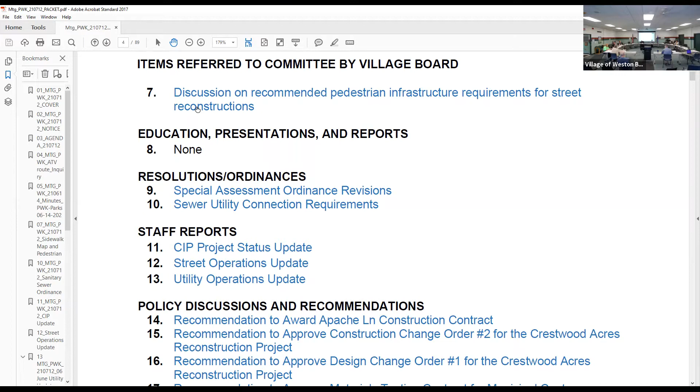Item 7, discussion on recommendation, pedestrian infrastructure requirement for street reconstruction.

Michael: So at the June village board meeting, they voted to remove the sidewalks from the Crestwood Acres neighborhood reconstruction project, which were being included based on the village's subdivision code as it is written right now. So the discussion at the board meeting focused on the need for the dedicated pedestrian improvements in the local street subdivision projects. Historically, we had a sidewalk and trail map which showed which streets would be getting sidewalk in the future, which ones wouldn't.

Our arterial and collector, our thoroughfare streets, would still have requirements to have pedestrian infrastructure. But the real question was what are the requirements, or what should the need be, for the local streets? So the task from the board was to go back and redevelop some criteria that could be used for future projects and provide the guidance moving forward.

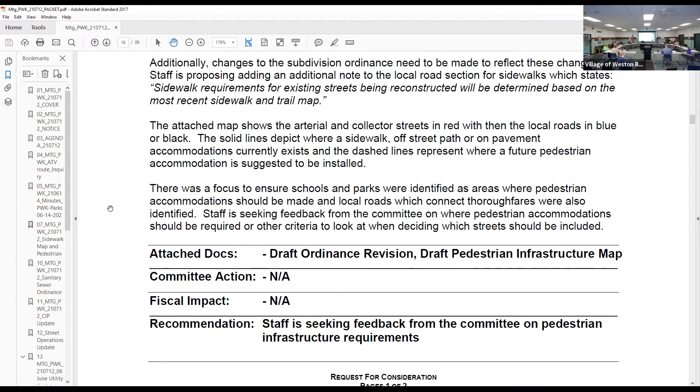So again, in the past, there was a focus usually to connect schools and parks within areas that met up with the local roads. So like Ross Avenue, Schofield Avenue are our arterial streets. So then streets that would maybe connect Ross Ave and Schofield Ave together would show up as a local road requiring sidewalk.

I guess we took a stab at this on this map. So the red lines are what is designated as our collector and arterial streets, which either already have or would get sidewalk or multi-use path in the future when the street is reconstructed. The solid blue lines are local roads that currently have sidewalk. And then the dashed lines are kind of the thoughts on where we, at the staff level, or even looking back at old maps, thought of adding sidewalk.

So just to note, Schofield Avenue has one side, the south side, with a sidewalk, correct. Is there any thought on the north side? Because before, I was saying, municipal centers, this side, a lot of people walk through. But now we're gonna move the municipal center to Camp Phillips. Still, we should think about it, or do you think there's a need for it?

Yeah, like I said, the code requirement right now for any arterial or collector street is, upon reconstruction, it would get sidewalk on both sides or a multi-use path on one side. So I guess if we were to reconstruct this, or if the village board said we should put sidewalk on the north side of the road as well as the south side, I guess we would do that. I guess the main question right now is just what do we do with our local roads, our neighborhood streets?

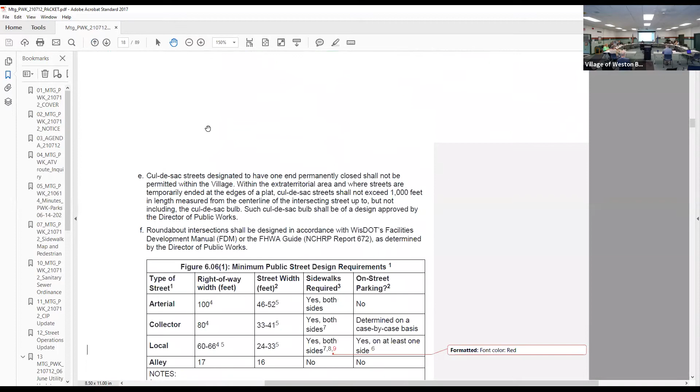Okay, now you want to talk about the collector street? Well, the local roads, the neighborhood streets, like I said, looking at how the code reads currently, jump up to that. Any arterial or collector street, sidewalks are required, yes, both sides, with the one caveat that sidewalks could be 5 feet wide, either a 5 foot wide sidewalk or a single 10-foot wide multi-use path.

And then for some collectors, if they're in a more rural area, they could be paved wider and have a paved shoulder instead of a sidewalk. So I guess the main question is on the local road, if we are changing that, how do we want to change it? I guess right now, I just had a note there that for local roads, sidewalk requirements for existing streets being reconstructed will be determined based on the most recent sidewalk and trail map.

So when I read that and reviewed it, my thought right away was, do we really want to be that definitive, or are we going to paint ourselves into a corner? Do we want to add the word 'primarily' be determined? Something like that, yeah.

Yeah, I just said that because there's all kinds of situations I started thinking about where you might decide, in this situation, even though it's not laid out on the plan, maybe you would want a sidewalk for some reason. Is there additional traffic in some area? Is there some type of public, a school or a bus stop, or I don't know what.

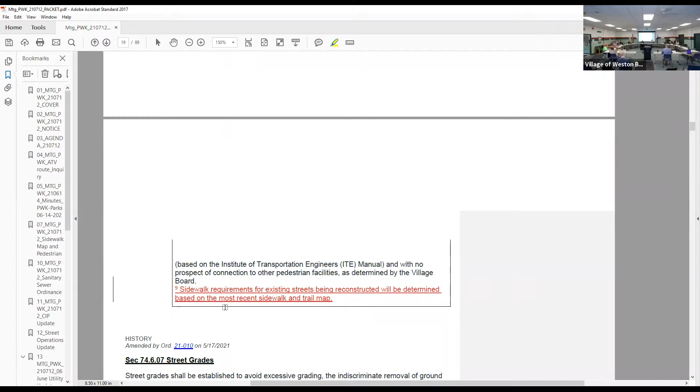Well, the thing is, I think if you look at our neighbors, let's say Rothschild, when they annexed all this in the street area, that was about 4,000 people and there was no sidewalk in there. But the first thing they did, they proposed to people, they said, we're gonna put the sidewalk in. And people decided they want to come back to the town of Weston again, which was practically impossible, that's not gonna happen, because by law you cannot accept it. So they told the people, you're gonna get it, and I think they gave it to them, they gave a sidewalk in there, that was it.

And we are kind of, if people come and complain, we say, okay, we think about it, and we think about it, and we take it out. So I'm not sure where we want to be, we want to be in the middle of the road, or not to propose it at all. Or, yeah.

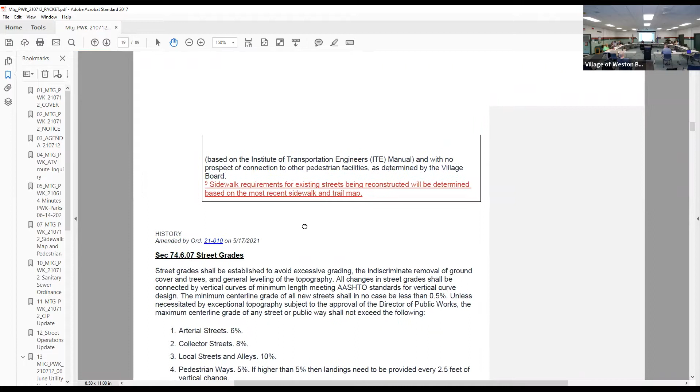Look at the subdivision and see what's the status of it, and usually I think the newer subdivision is easier, or we can tell the developer, that's part of your plan, do it. Yeah, and I guess that was the reason for leaving it as just reconstructed streets too, is new streets, that's part of the subdivision process of being created, determining what public infrastructure is included there.

I guess to Roy's point, that was the goal of trying to highlight where our parks and schools are, what routes make sense for connecting two busy roads to each other, like around Weston Elementary, put it all the way around there. Kennedy Park has sidewalk all the way around it currently. The junior high is missing sidewalk on one side, and there's really nothing on the back side of the high school, so we want to try to connect those to each other.

Or, the city of Wausau, talking with them, they seem to take everything on a project by project basis, and the committee and the board decide for each project whether we're putting it in or not. You mentioned the Village of Rothschild, that area that got annexed, except for Alderson Street - they reconstructed Wall Street a couple years ago and it didn't get sidewalk put back in. They pretty much have defined an area of the village that they consider their urban section, and the other part of the village outside that section just isn't going to get it.

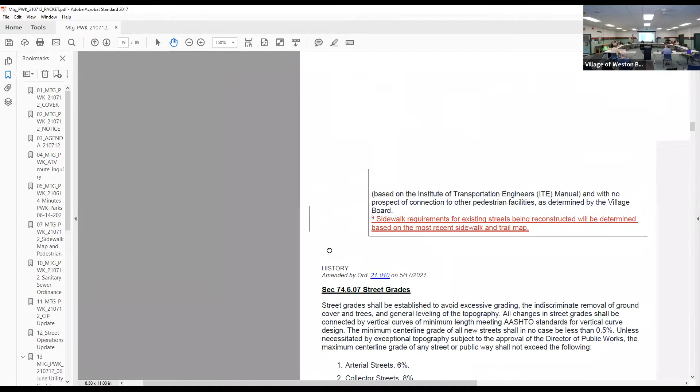So I think the message is we still need to consider all the multimodal or non-motorized pedestrian transportation needs. We used schools, parks, and shopping areas as criteria to establish where others might be needed. So if you insert that word 'primarily', I think that does leave some wiggle room like you're talking about - we don't have to come back to revise the ordinance every time there's a proposed change. But at least we would, maybe we also add that it be subject to committee or board approval. Maybe that's the case in all of this stuff, I guess.

This street down the road here, before you get to Ryan, there's a park at the end of it - Teagan, could be. Yep. That street gets only local traffic until there's a baseball game at the end in the park. Then it is busy, very busy.

Yeah, so if you look at that, we had sidewalk being proposed in the future. If Teagan were reconstructed, there'd be sidewalk from Schofield Ave to Teagan, and then even on Fife over to Bryant Street. Okay, so what about down here?

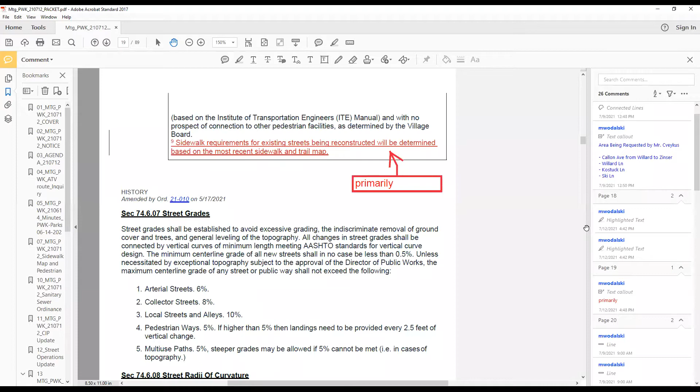I'm of the opinion, and I'm not 100% sure if Chairman Zagami touched on it, but if he did I'll reiterate it: for every new development that a developer is putting in, we should require sidewalks, full stop. And then also those large arterial streets that lead off into some other major residential streets, like what you said, Director Wodalski.

Maybe not Rodney, but East Jelinek and East Everest, I think, would be good examples of that second tier that should have sidewalks.

So on that one, we do have East Jelinek shown as a sidewalk road. I don't have it on East Everest, but it is on Barbican, so Von Kennel would be the future sidewalk street as well.

Is East Everest one we feel we should still put it on? Well, we voted just to not do East Everest. True, yeah, so I guess that's my last one, but that sort of situation.

Even like the Sandy Lane neighborhood, we showed it on Sandy Lane going in, and then kind of Canoe Street wrapping around to Quentin out to Mock Miller Park, and then Isaiah Street making a loop out there on the east side, but not going west. So I guess those would be conversations too inside those neighborhoods, if that's adequate or if there are other streets, but those would be ones we take on or discuss further as we get there.

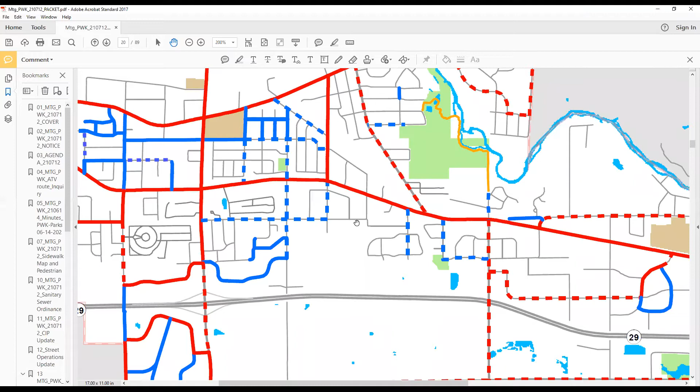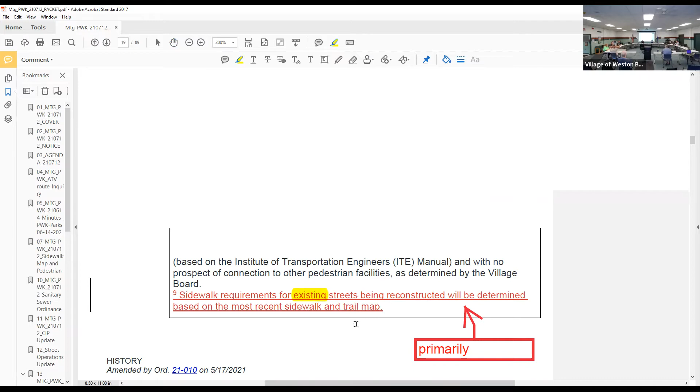Okay, and I think that's the proposal still, that it would remain, I think we have that one in the ordinance. Yeah, so that was, I guess the other part too is, specifically, where's my highlighter? For existing streets, put this note in there, so new streets wouldn't fall under that exception. It'd still be under, yes, sidewalks required on both sides.

Okay, then I guess we could probably debate how this map should look. Yeah, all night, yes, but yes. To Luis's point, or I guess the original staff report that went back to the board relative to this item coming back here was that I thought it would be logical to still connect East Everest, since the grading's been done out there, or at least it was. I don't think it's been filled in yet, but.

No. So I think one part of this tonight would be

any action on the proposed changes to the ordinance. But then also, with respect to the recommendation to remove the sidewalks entirely from Crestwood Acres, if there was some sentiment to still suggest that some be put back in. We can revisit other areas of the map later, but I guess any second thoughts about the Crestwood Acres project would be part of what you would want to address tonight as well.

Can you bring the map up for Chris? Yeah, so this is the Crestwood neighborhood, so this is Douglas, Randy J, Rodney, Kirk, Robin, and this is East Everest. And did we take them all out?

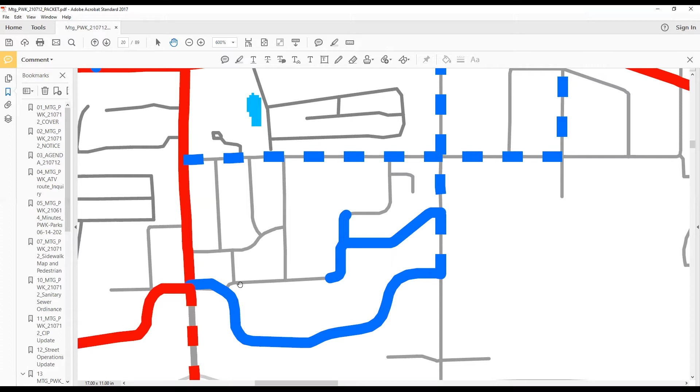Actually, I excused myself from the discussion because that would be an ethical violation for me. Sorry about that. All good, he just left the meeting. Yep, I recall that now.

So staff recommendation is put it back or just - well, wasn't it before the board took their action? I left it off on this map due to the board's actions, so I didn't put it on here after the board recommended we create a sidewalk trail map. When we went back to try to recreate a sidewalk map, I didn't put it back on there since the action at the time was not to install sidewalks in there. Which, again, 5 years from now if we wanted to put a sidewalk in, it would be possible. It's not impossible.

I guess the goal of this was just to try to make it so our ordinance can be modified so it matches actions taken. It has to, yeah. So we can't sit here and vote against the ordinance, then we shouldn't have an ordinance at all. So part of the ordinance is having this map.

So I guess the question is, are we adopting the map tonight, or recommending this version of the map?

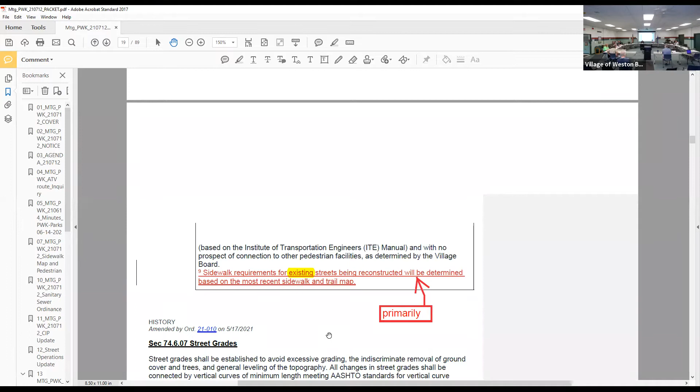What's the language you wrote at the bottom of this? It's not at the bottom, it's in the - yeah, so I left the RFC a little blank in case people - if you go to background, it'd be the 1st, 2nd, 3rd, 4th paragraph.

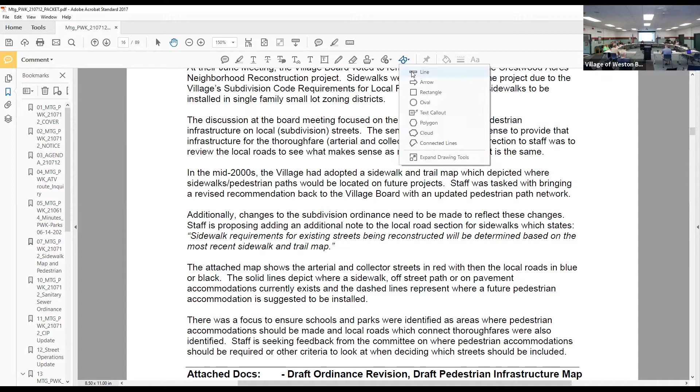So it's something else, which is - did you? Well, you made the motion, correct? Right, yes. Do I get a second? I will second, get in there. Is there a second? I'll second.

Okay, discussion. Any discussion? I think we had discussion already. No, I have nothing to add other than what we've already talked about.

Okay, Nate, are you with us? Can't you - you cut out, what is the motion we're voting on? Is this specifically for Crestwood Acres? No, it's for the entire village. Okay, if it's for the entire village, then - could you read the motion again, please?

What is the motion in its entirety? I'm looking it up, hang on. Oh,

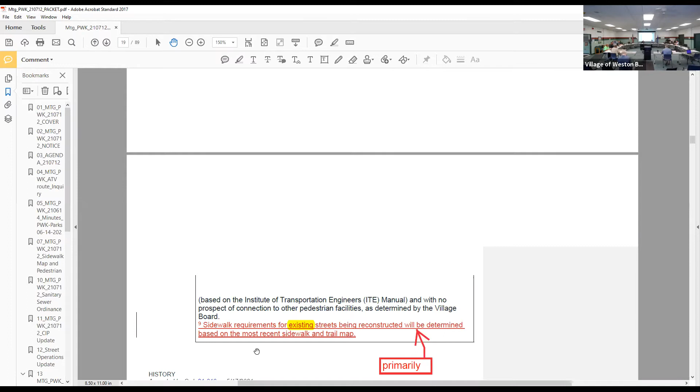Lewis suggested that the language primarily be added to subsentence 9. Sidewalk requirements for existing streets being reconstructed will primarily be determined. That's the motion, and we have it on the tape also, you can listen to that to make sure we got everything correct.

So Nate, if you could see the screen, the motion was to add note 9 to the sidewalk requirements for local roads, which would state that existing streets being reconstructed will primarily be determined based on the most recent sidewalk and trail map, with this being the sidewalk and trail map.

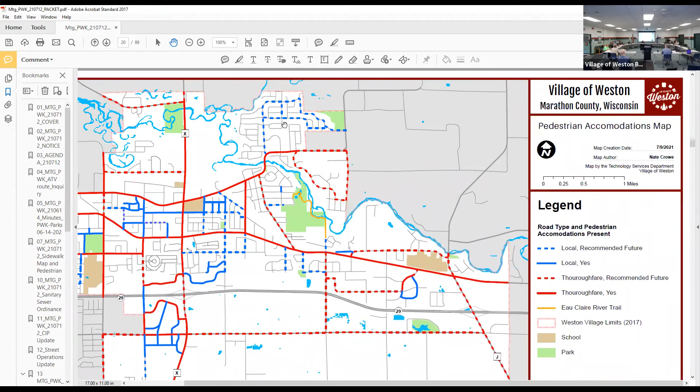Sam, you're gonna date that now? Yeah, so we'll date this map as of, I think it actually was recommended to the village board. Yeah, and that's what we recommend to the village board.

Okay, all in favor signify by saying aye. Aye. Nate, yes, I voted aye. I have it, thank you.

All right, and then I think we got Bob in the audience here. Hey, guys. I've come up to the podium. Make it formal, right? Please, and your address for the record.

For the record, Bob Cveykus, 5107 Ski Lane, Weston, Wisconsin, 54476. Got it? I can go slower.

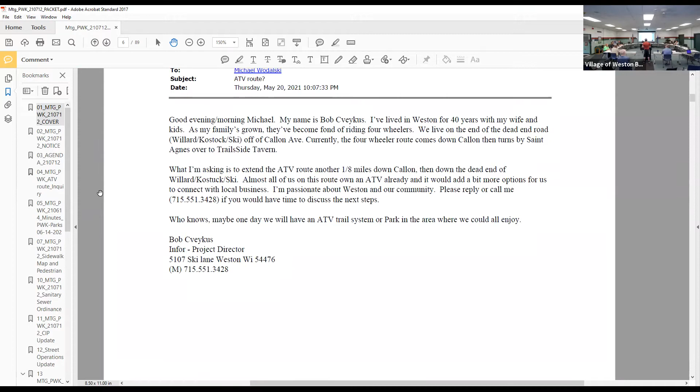All right, so I sent this over to Michael here, this email. Ultimately, just wondering if we can extend upon the current ATV road system. There's a perfect picture right there. You guys did great work already. I think it speaks for itself, but if you look, we're on a very rural street, dead end.

All of us on that road, I would say 90% of the people on that road anyway, all own ATVs, UTVs. Would definitely be value added to extend upon what already is there, go down another 1/8 mile of road, and just extend it from where it cuts over right now to get to, I don't know, by St. Agnes right there area, to continue it down Callon and then down Willard, Kostuck, Ski.

Like I said, very rural area. We all are owners of ATVs, UTVs already. So I don't know, just open to any questions you guys might have as to what your thoughts are on that. I think your letter said everybody in that neighborhood has an ATV. Yeah, I would say, on there.

I was actually doing a count on it. I counted about 14 driveways, but there's 2 or 3 driveways that I've never seen anybody in, but obviously they could build down the road. So that's about how many there are, give or take. I've got onX, I could tell you exactly property owners, but I was just going by driveways. So you say about 10 households? Yeah, probably about 10 or 12 ATVs that would be in that area, yeah.

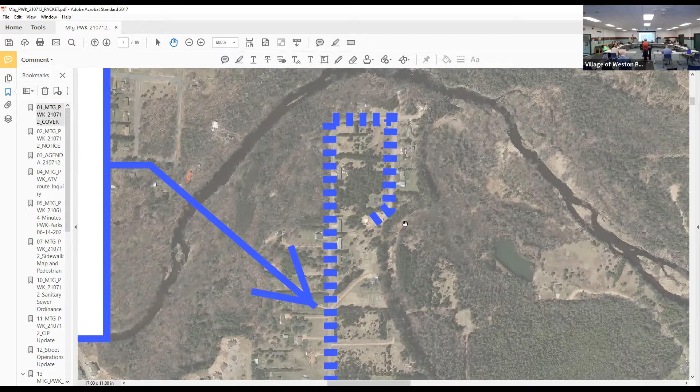Tell you a long story, I was out in South Dakota, out in the Badlands. I'll keep it brief, but it was amazing, the community and how people abide by the traffic laws. You don't see anybody, and I don't know about Kronenwetter or anybody around here, but you don't see anybody abusing the ATV system. It was just neat to see how different states handle it.

I wouldn't propose something for in the city, but out here in this area, I mean, I definitely see that we have the means of connecting up to it, being able to get to local establishments, other areas, being able to connect out.

My kids, as they're growing older, they're in 4-H. They're involved with a lot of the dairy barns down the road and stuff. And it would be nice for them as they age to be able to get from one area to the other, and go from, I don't want to say community to community, but be able to expand upon that a little longer. Now all that said, the way the laws are currently set up, my daughter's already getting her license, so really she'll take her car before she would take an ATV. But I still think it's the idea of having that ability, so.

Any question? Is there any other future development that's gonna happen? On those streets, they're all pretty large lots. People tend to have their houses further back from the road.

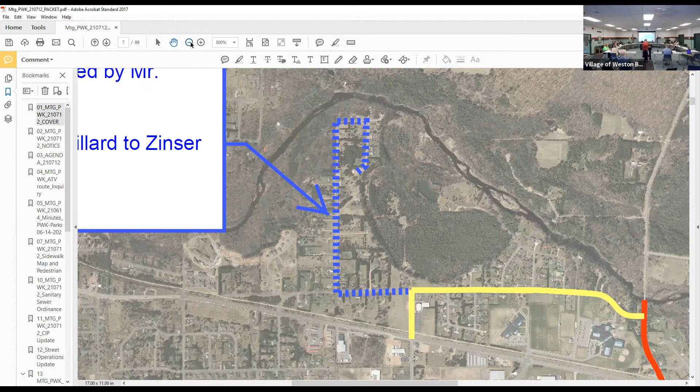Michael, the yellow lines, what are those? Earlier this year we had a request from the ATV club, so the yellow lines were approved, I'd say March or April of this year, maybe right before Roy and Luis both got on the committee. So there was a north part here on Callon and Zinser, and then the southern part was to connect to the village of Kronenwetter. So again, these are all primarily rural roads, meant to just help the ATV riders have that connectivity and ability to drive from one community to another here in the area legally.

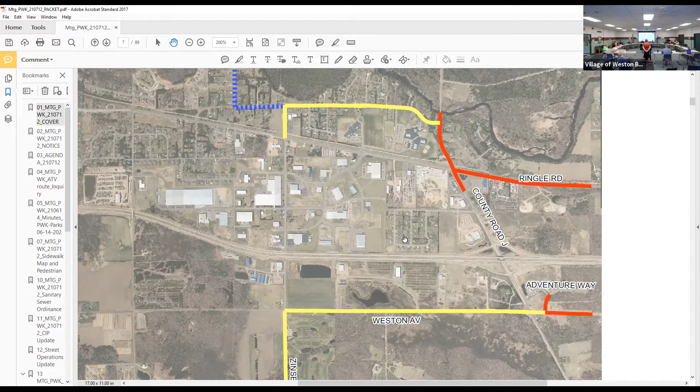I personally think it's a great idea. I'd love to see much more of the village added. I think it's kind of silly there's these other neighborhoods, also large lot zoning, that come off of those yellow and red lines that could probably be added as well, to be legal to drive to the trail instead of trailering a block down. But I think that's part of a bigger conversation.

And I guess we've just been... I would agree. One of the things that makes Weston really attractive is the recreation opportunities, especially being in northern Wisconsin. That means ATV, snowmobiles. It doesn't seem like this would be an issue. Let's do it.

Yeah, so I was just going to add, as a village, we've just been taking these on a case-by-case basis as people have requested roads. We've looked at them, had Everest Metro provide any insight.

So they're just riding on the street, huh? Correct, yes. Is there a speed limit? Yeah, it's 25 is what it's currently on the yellow, and the red is 25, so I would assume we would carry that forward as 25 miles an hour on everything. Or if it's slower, if a road was 15, that blue road, I would leave it at 25 myself.

I know the village of Kronenwetter, I believe they allow for it on any road that's under 35 miles an hour. Roads above that are not allowed for ATV, UTV use though. Okay, anything else? Your wishes.

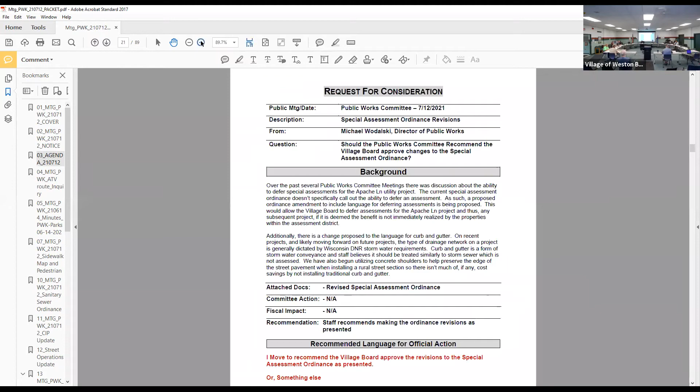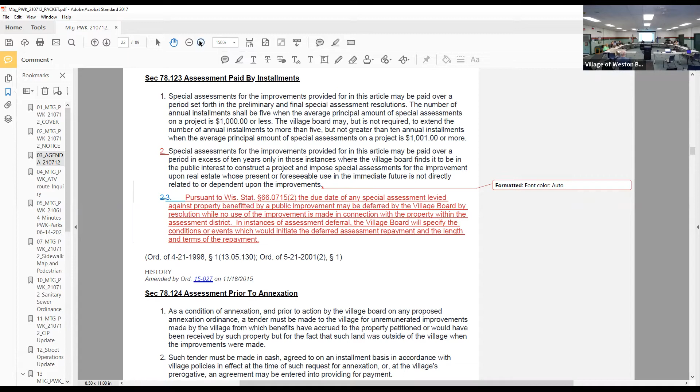Who's doing that? Go around quickly. Go ahead. So with our recent projects and discussions we've had, on the first one for Apache Lane, we had the deferral of assessments past the 10-year window, which our assessment ordinance currently states. So I'm talking with Attorney Yeedy, he recommended that we add in that option of deferring assessments longer. So we would add this subsection 3 here, just saying pursuant to Wis. Stat. 66.0715, the due date of any special assessment may be deferred by the village board by resolution. And then in the instances of the deferral, the board would have to specify the conditions or events which would initiate the deferred assessment repayment, and then the length and term of the repayment. So I think for Apache, we did the assessment to 20 years.

Correct. Right. So the ordinance is saying 10 years. Yep, so I think it should be... is this, it's just we were talking about it. We set up the ordinance, then we go against the ordinance. Yeah, I don't understand. So that's why we're bringing this in, so that it does meet, I guess.

To be clear about what the attorney said, the board has the ability under statute to make a deferral, whether we have it in the ordinance or not. He just suggested that we add this language with the specifics of the board can set the criteria for how long the deferral can be made or the conditions under which the deferral can be made. So this is just making it more clear, more explicit.

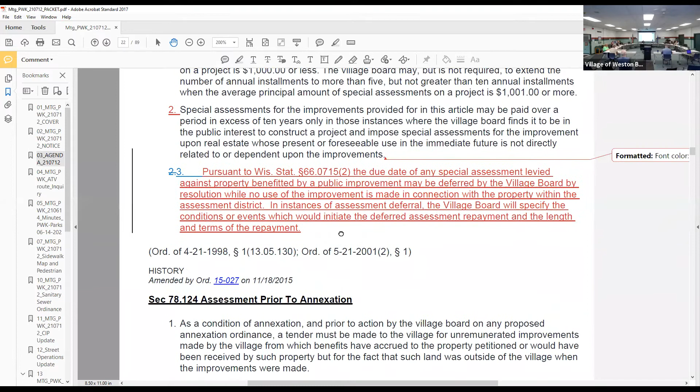I think the other item with the length of deferral for us to consider is addressed in the specifics of the sewer ordinance where we require connection.

Okay, and I guess the second part of this was in relation to the curb and gutter. So just trying to clarify the language there that for new streets, 100% of street and curb and gutter construction would be assessed. The assessment calculation for curb, gutter, and pavement is on new streets. I think that's just a clarification, I guess, for myself reading it - it looked like somebody could argue that if curb and gutter were to be installed, it could be assessed. The title was determination of assessment cost for new street and curb and gutter. So since we're looking at the special assessment ordinance to make one revision, this helped clarify it for me.

Is that item 10? No, it's part of 9. So there's two revisions to the special assessment ordinance. One is for the deferral language, and the other is to clarify that for new streets, the street and curb and gutter costs would be assessed. We typically have the developer install that at their cost, but if somebody were to ask if they could have the village install it and then assess them for it, that's always an option out there too. But why are you asking for trouble?

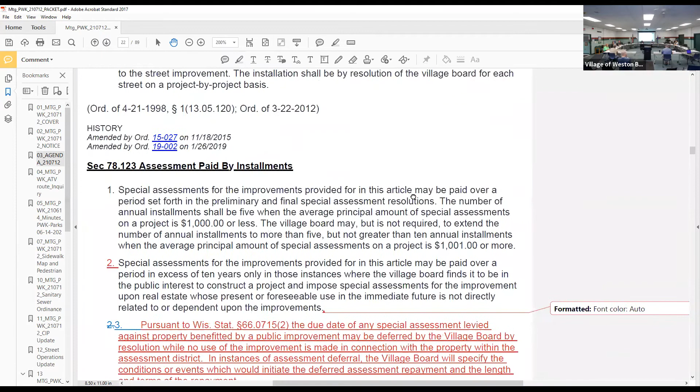Okay, so what's your wishes? I'll make a motion to recommend the village board approve the revisions to the special assessment ordinance as presented by staff. Second. Discussion? All in favor signify by saying aye. Aye. Aye. Opposed? I have it, thank you.

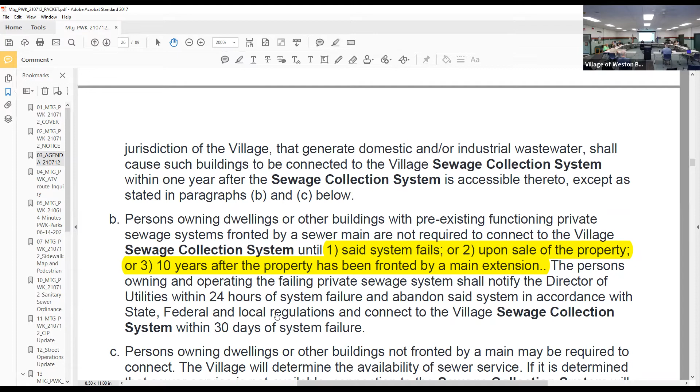Item 10, sewer utility connection requirement. I don't know if I put the language in there - I just highlighted this one. The current sewer ordinance requires connection when the current system fails, upon sale of property, or 10 years after the property has been fronted by a main extension. So I think we've got two options: we can either just change that 10 years to 20, or leave it at 10 years and add an exception for instances where the village board has approved deferring connection longer than 10 years.

I'll prefer the second one. Okay, what's your thought? You're saying to go to 20 years versus - not 20 years, no, just leave it to the board if they want to extend it. Maybe we want to add that they cannot extend it more than 20 years. Okay, so you're going with item - what do you - item three, the second option, I guess. Second item 3? Yeah.

Should have made that an A and a B. Okay, that's the one I was in favor of also. I think it's item 3, isn't it? Maybe it's item 3, too many items. It's the threes, the longer one. If you look at the ordinance currently, it's that item. That's what I was trying to clarify.

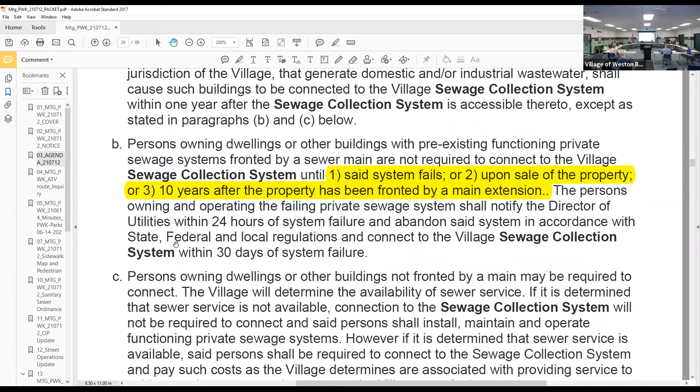Did you make a motion on that? I'll make a motion. Go ahead. I'll make a motion to move to recommend the village board modify item 3 to say 10 years after the property has been fronted by a main extension, except in instances where the village board has approved deferring connection longer than 10 years. I second that. Any discussion?

All in favor signify by saying aye. Aye. Aye. Opposed? I have it, thank you.

Okay, item 11, staff reports, CIP project status update. Let's hit the highlights here.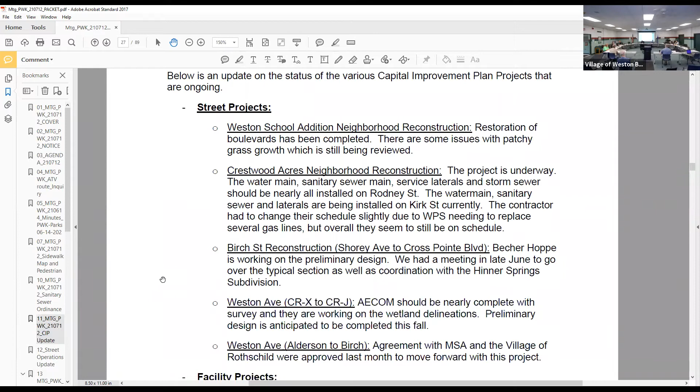Still some ongoing restoration, grass growth issues by the Weston School neighborhood. Is that on South Timber? South Timber actually looks the best. Von Kennel, Arrow, Sunset, parts of Kennedy. But we're working with the contractor on that.

Is the seed bad, or what happened? They planted it and then we got that real hot, dry temperature and they never came back and watered it. By the time we realized they weren't watering it, the weed growth had started, and now we've had the rains and the grass is starting to peek through, but there's still a significant amount of weeds growing in the ditches. Well, then you gotta come and take care of it. Yeah, exactly. They asked for a pay request for restoration. I said no, you didn't get grass to grow, so you didn't meet the requirements yet. We're still working through that.

And that's what we promised the people here. Yep, there was a specific question: if the contractor doesn't do it, how are you guys gonna take care of it? My response to them was, we hold the last final payment until everything is taken care of properly. Correct, so I think that's what we're gonna do, and he should understand that. If he doesn't understand it, he should read the spec.

I'm sure the spec can explain to him what he needs to do. Actually, we do exactly what the spec says. It says you have to get grass to grow 6 inches before it's deemed planted, I guess. Okay, then we do what the contract said, according to the contract. So otherwise that project is done for the year.

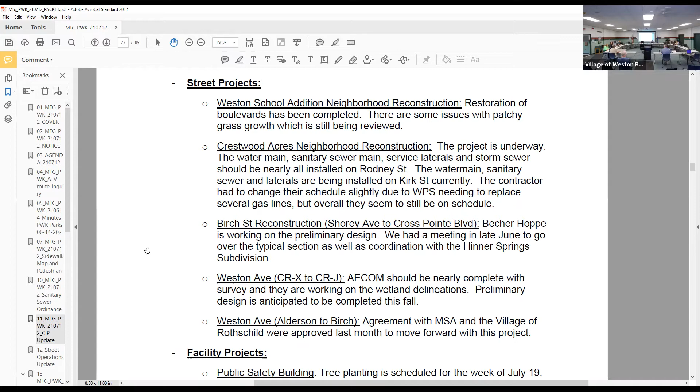And then the other ones are still just in the planning stages. The municipal center project, tree clearing is supposed to start this week on that site. When is he gonna do that? Let's just say Wednesday here. Wednesday would be when they'll be staking the lot lines and the corners, but they might be moving in to get some of the interior cleaned out.

Well, I thought we were gonna mark it. We'll mark the lot lines, it sounded like. No, mark the trees, along the lot lines and the corners, on the perimeter. Right, so that'll be happening on Wednesday.

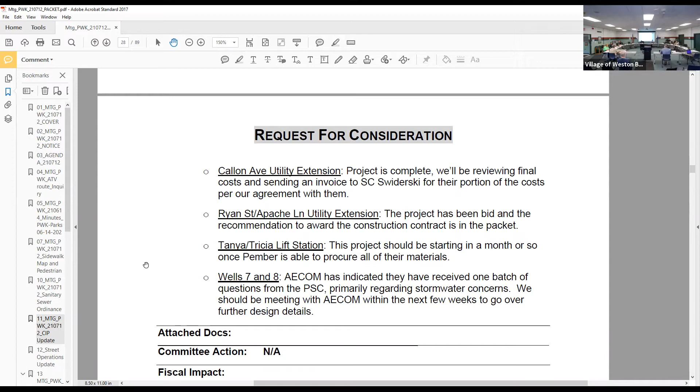And I guess the Tanya Tricia lift station, sounds like Pember's ordering their materials and getting ready to start that. So once they get their materials, hopefully later this month or early August, they'd be getting started on that. And the Ryan Street, Apache Lane extension is in the packet for construction contract award. I got nothing else to add unless you guys have any questions on those.

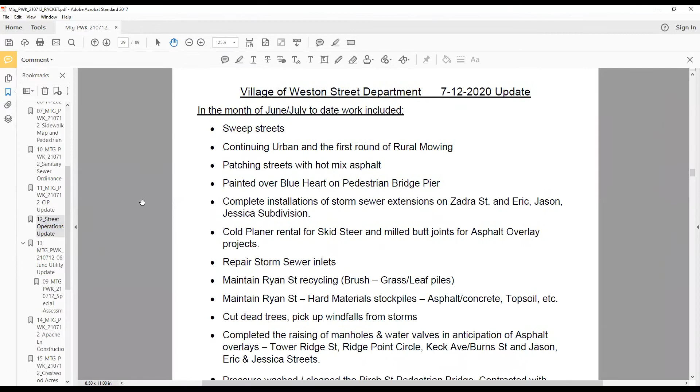I don't have a question. Do you have a question? No. Okay. Nate, do you have any questions? Nothing. Nope, nothing. Policy discussion and recommendation, item 12, I guess, sorry.

I'll give you an update on what's happening in the street department. The usual: cutting grass, patching potholes. We've been having a rash of inlets falling apart. It seems like we've been out sweeping and we're finding more of them, so we're gonna be taking care of that. They were down in... excuse me, do you think they got hit by something?

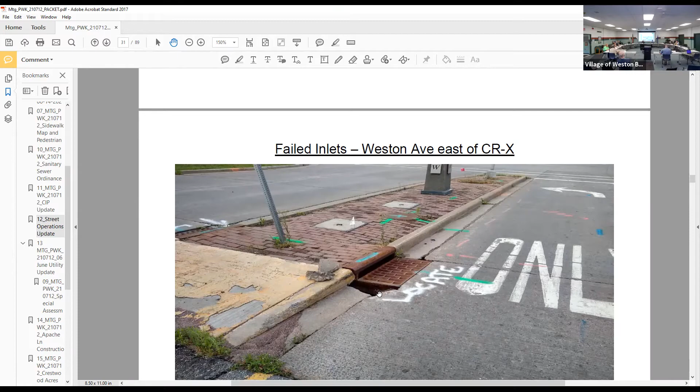Up by the hospital on Cranberry, those inlets are 20 years old and the concrete adjusting rings are gone. When we go and sweep, we're finding them. I've got a list of probably about 15 of them we need to replace. It's basically pull a casting, put new rings on it, pour curb, and redo the asphalt on it.

So those are on Weston Avenue. This picture is on the east side of County Highway X. At the east end of the island there's a hole there. Both of them need to have new rings put in. We seem to have more of them this year, we're just finding more.

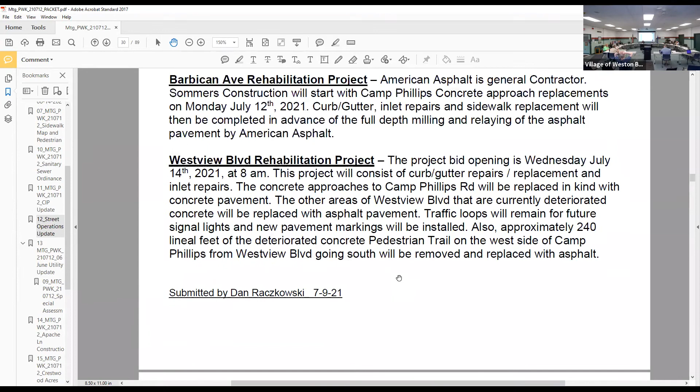Just a typical Normandy Street, we're doing a storm sewer extension from El Segundo going south up to Monterey. After that, we're probably gonna be looking out by Wausau Supply, some storm sewer inlets, putting some in front of their building. They've got huge downspouts coming off the roof, we had icing issues last year. There's a lot of utilities in there, but I talked with the guys on the crew and they're not too fazed by it. So that's probably our next big thing.

A quick update on what's going on: the crack sealing is 90% done on the contract work. He's got to come back, he had to start another project. The asphalt overlays, they're actually working on this week. They should get most of them wrapped up this week, our streets with asphalt overlays. Kramer will not get overlaid till later, till after the Apache Lane sewer work is done, or water rather.

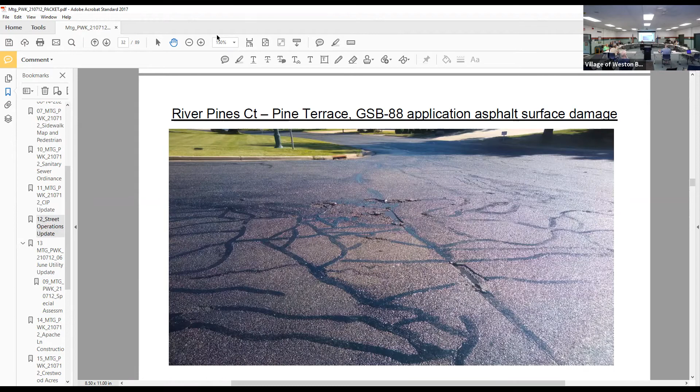The GSB 88 is like a commercial grade driveway sealer. We did Schofield Avenue last year out here. We did other subdivisions this year, and there was an issue down by River Pines. I met with Farner and they're talking to American Asphalt on what they're gonna do to fix it. They sprayed the road, I think they got too much on it. It wasn't dry completely and traffic ran on it, and you can see that road was kind of cracked up. It had been crack sealed not too long before they did this, but it pulled the rubber out in places and took some of the asphalt overlay with it.

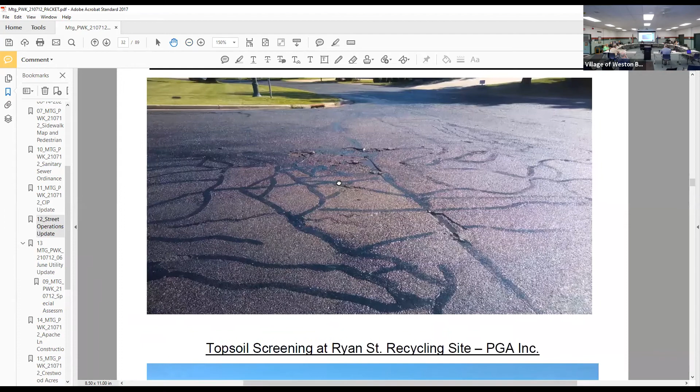I talked to American Asphalt today because Fahrner, the one that sprayed this stuff, was claiming that the asphalt overlay wasn't thick enough on the road. American Asphalt said, well, we'll take a core of it and get it tested, and I'll guarantee you there should be an inch overlay on it. So the ball's sitting in Fahrner's park right now, and basically I told them they gotta fix the mess they made. They do have to go and respray some of the streets a little bit. There's places where they went and you could see it was running light, I think they were having issues with the truck, that's what I really think it was. So the GSB 88, they're gonna get that straightened out.

Projects left to go: probably in July, the Eau Claire River Bridge down by the roundabout's gonna get rehabilitated. Deck repair on that, the whole east edge needs to be replaced on the deck underneath it, it's fallen out. Then once they're done with the deck repairs, they're gonna put the epoxy sealer back on, the two-part epoxy overlay on the areas that were disturbed.

What else? Ross Avenue, we don't have a date yet on when we're gonna be milling and paving from the east side of Camp Phillips out to Mesker.

Screening topsoil, PGA's got about 1,000 yards screened so far. We had it tested for organics, they're doing a nice job. His dad is actually the one running it, I talked with him today and he's doing a nice blend. We're taking some samples too as we go with this, as he screens. Once it's screened, I'll have enough samples, we can send them in and get not just the organics but find out the pH of it and what else it's lacking. So if we go to seed stuff, we know what we're looking for in fertilizer and lime on this stuff when we use it.

Barbican Avenue, they started today, Sommers Construction is doing the concrete replacements off of Camp Phillips. They should have the eastbound lanes, they got the eastbound lanes taken out today.

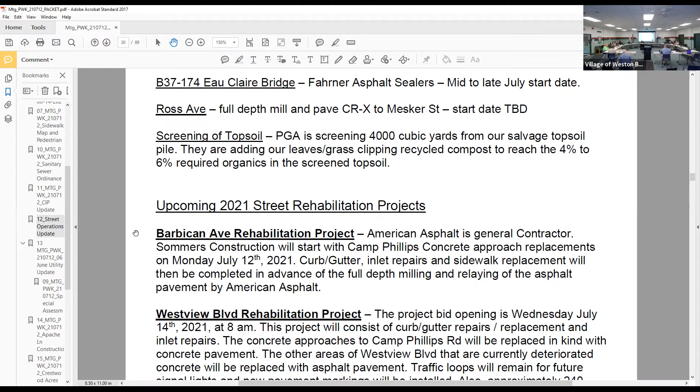And then Westview Boulevard, we've got a project bid opening Wednesday at 8 o'clock on that. Had quite a few people take bid packets, I think I sent out like 7 of them. So it's gonna be interesting to see where the pricing comes back on Westview.

That's gonna be basically concrete removal, some concrete pavement replacement, a lot of curb replacement, and then instead of having concrete throughout the length of Westview running from Camp Phillips all the way to Sherrill Tire, once we get off Camp Phillips and make the radiuses, that'll be concrete. After that, we're gonna pave it with asphalt.

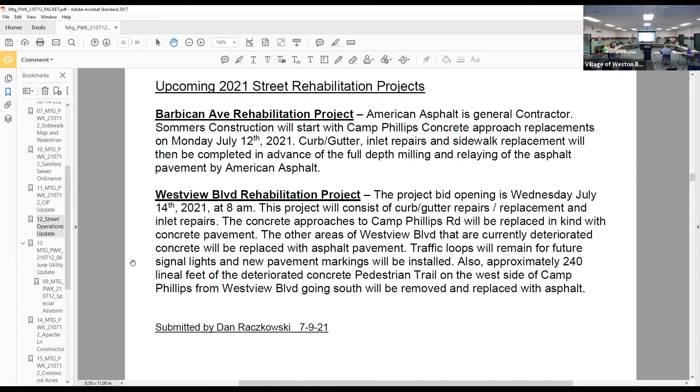So I talked with the DOT and their recommendation is when you're coming off a highway like that, you're better off to have the concrete coming back off the radiuses because it'll just last a lot longer. So keep your fingers crossed, hopefully the prices come in cheap.

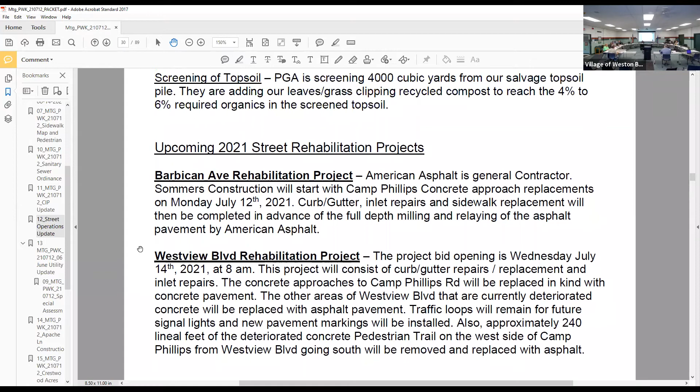Okay, getting back to Ross Avenue, you're gonna repave Ross Avenue, right? From 25 feet wide, yeah, just like we did last year. Okay, you're not gonna do the bicycle path, you're just doing the main driving area, and that's from X to Mesker, yep.

Why Mesker, why not all the way to the bridge? Because we didn't have enough money to get all the way to the bridge this year. We're gonna get past the intersection on Mesker though, we're gonna take that intersection. And then next year, the plan is to go from Mesker to the bridge.

So we're gonna take the existing blacktop off of it, then check the base and make sure the base is okay, and then put the blacktop back. Correct, full depth, 5 inches. Okay?

Any other questions, gentlemen? Nate, you have any questions?

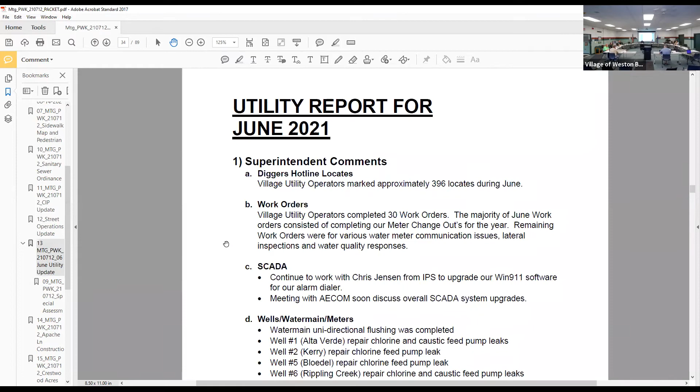Nope, nothing. All right, policy discussion, yes, I'll be brief. I'm sorry, why not, you're not in the agenda, why? Jay's lost, we're there on number 13 now, still under staff reports. So busy week, or excuse me, go ahead. I'm sorry, all right, I'm easily forgettable. No, that's not it, you're not on the agenda, that's all.

Busy month again for our operators for locates and work orders again.

We did wrap up our flushing operations for our water main. As some businesses are coming on board here, we've had to make some tweaks to some of our sequencing. Case in point was Tommy Wash, our guys had to tweak some things just to make sure they weren't having to shut down their operations. We have some other areas where upgrades to some hydrants and future looping will probably alleviate some of the other concerns with some other businesses as well. So it's just kind of a living thing we got to tweak every year.

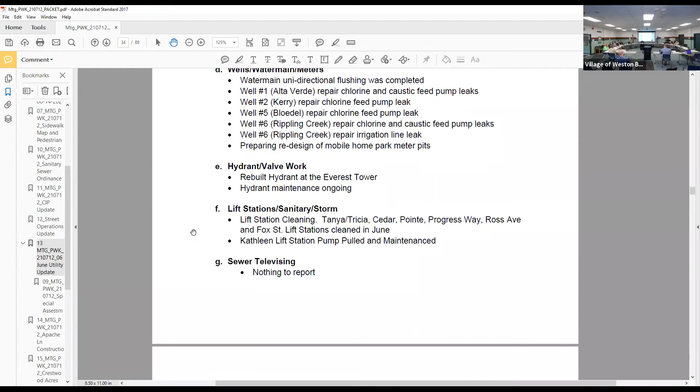For some reason, there was a lot of chemical feed leaks this past month that the guys have been working on. We got our summer help Dan doing a lot of hydrant maintenance around the village. We wrapped up all of our lift station cleaning, I think we got them done end of last week.

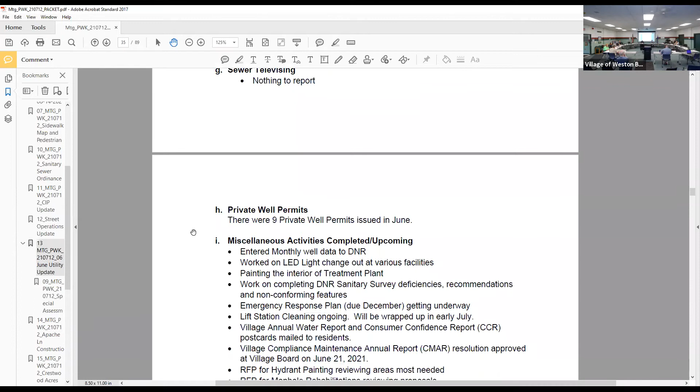So now we can start on our sewer jetting. I think we're gonna get out there starting tomorrow, start jetting all the sewers. I guess not all of them, just this year's portion of it. How many miles? It's about 33. We do about a third of the system every year.

Okay, yeah. As far as some of the miscellaneous stuff, we entered all our DNR data. The guys were out today looking at the Everest Tower. We got to do some upgrades based on our DNR sanitary survey, working on one of the overflow spouts on our Everest Tower.

We're starting to kind of dig into our emergency response plan that's due end of the year here. I mentioned our lift stations are getting wrapped up. We did have the village compliance maintenance annual report approved at the last board meeting.

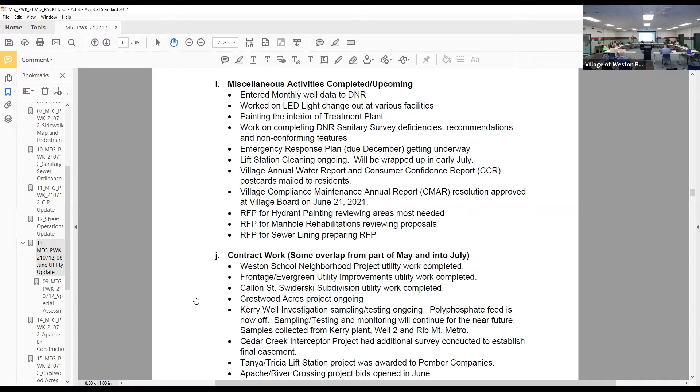Putting together some areas for our summer help to take a peek at some of the hydrant painting. We had a request for Newport to get repainted on their hydrants. We got all the main roads basically repainted last year. We're trying to find some pockets that we can get some hydrants painted this year.

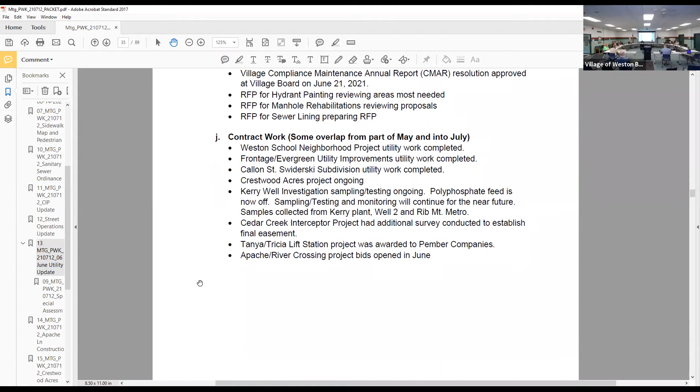Who's painting it? We had Ferguson do it last year. I think they've done the last couple rounds that we've had painting done. So there's a fellow we hire to do it, not the kids -- they don't have paintbrushes and stuff.

I have a few proposals in for some of our manhole rehabs that I'm going to be reviewing hopefully this week. And then we have some sewer lining areas that we're looking at to hopefully get out in the next week or so, before the year gets away from us.

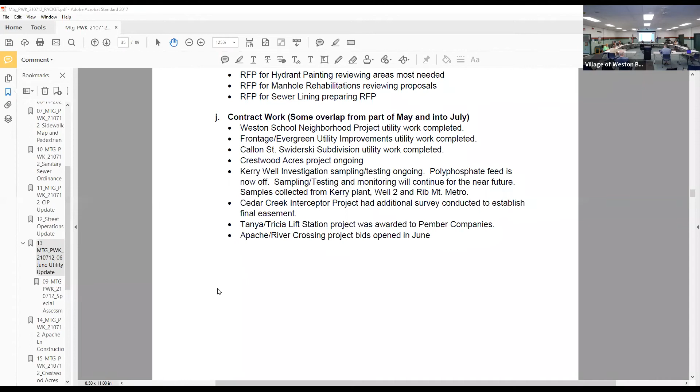Michael touched on most of the contract side of stuff. We do still have our Kerry Well investigation ongoing. We have a 6-month sampling event coming up on Wednesday. And then I guess that takes us to some of the customers added for the last month and our water and sewer data.

That's about it. Is that it? That's it. All right, thank you. Any questions from the staff? No questions. Okay, can I move on to the next? Now we're good. Very good, thank you. Do you have the final agenda? Yes.

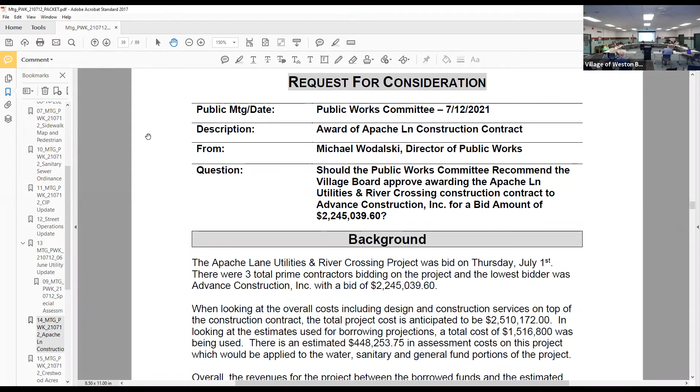Item 14, recommendation to award Apache Lane construction contract. Let's talk about this -- why so much different? A million dollars different from the lowest bidder to the highest bidder? No, actually more than a million -- $1.3 million.

And then from the lowest bidder to the second bidder, $987,000, something like that. They point out some item in the contract which they said was high. It still doesn't add up to a million dollars any place.

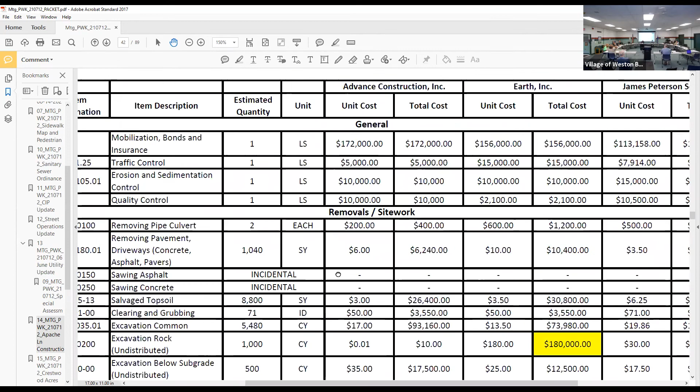The main part, just looking at it, is Advance Construction does their own boring for the river portion. So if you look at the directional drilling, Advance's cost for the water main was $427,000. Both Peterson and Earth Inc. were over $1 million -- one was 1.1 million, one was just under 1.1 million. So that's about a $600,000 difference right there.

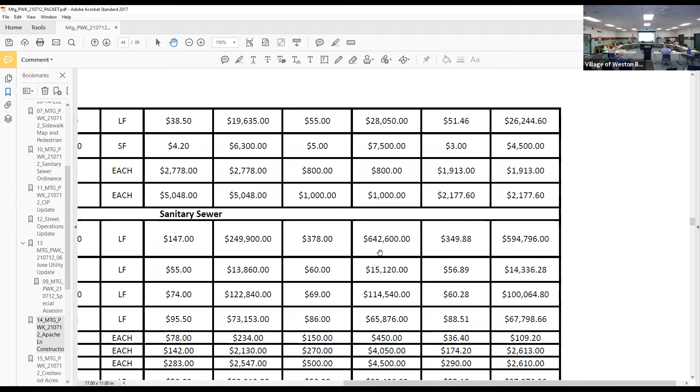And similarly with the force main, Advance was at about $250,000 and the other two were at about $600,000. That's another $350,000. What's the engineering estimate on the project?

I didn't find it, I'll look for it, I didn't see it. Yeah, theirs was, I think they had it actually about 2.5 million. I guess they got their number after we put all of ours together as far as our borrowing goes. But even this number is -- one is 2.245 and the other two are 3.1 and 3.5. But these numbers are different.

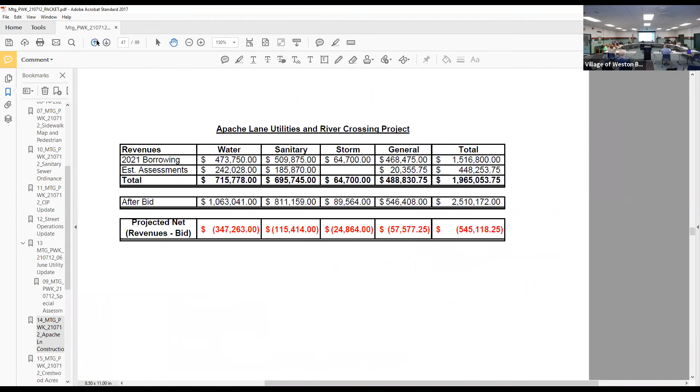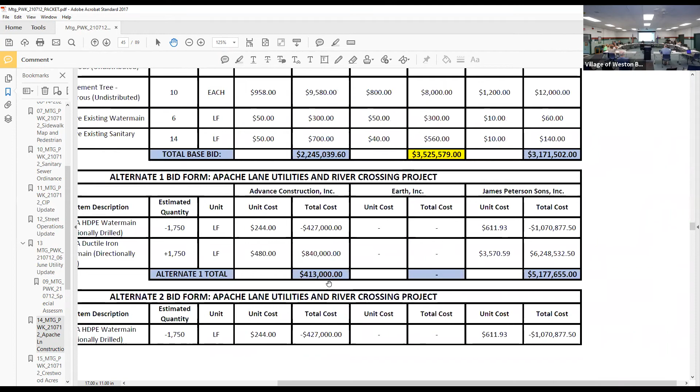Isn't it? And what are they showing on the bid tab? So there's a couple different alternates -- 3.5, 3.1 -- and then we had different alternates to see if pipe material made a difference. This alternate was to use the ductile iron water main, so for Advance to use ductile iron water main under the river, it would have added $400,000.

And James Peterson obviously didn't think that was even an option, so they threw some crazy number at it -- an additional $5 million if we were to go with that. I think they put a number in there so high that we wouldn't even suggest we go with that. And Earth Inc. chose not to even put an alternate price on it.

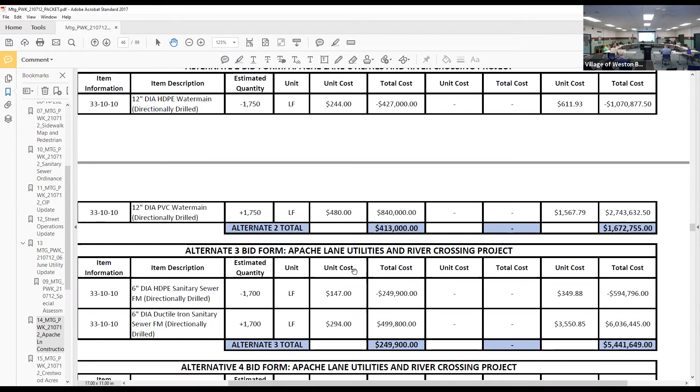And then for a PVC water main, it was similar. The thought initially was that maybe material prices or pipe prices could be a deciding factor, so we put different options in there for them to bid different material types, but the HDPE seemed to be the lesser cost, the more economical pipe material to be used for both the force main and the water main underneath the river.

Keith, do you remember how much we paid for a prior river crossing? Oh, that's going back almost 20 years ago. I think that was in like '99, '98. That was ductile iron, and that was installed just cutting a trench in the riverbed. Right, yeah, this is a different construction method altogether.

Yeah, this is also -- it's like 1,500 to 1,700 linear feet, so there's a lot of wetlands besides just the river crossing -- a lot of it is wetland crossing on the south side too.

I'll accept the motion for that. Before we go on the motion, I just want to ask, are you comfortable with their number? Yeah, we followed up with them. They've done work for the city of Oshkosh, Appleton.

And that was my follow-up question, have they worked through it before? Do they know how big of a gap there is? Yeah, and that was their justification, well, we do it in-house. Somebody, these guys are probably asking another contractor to do it. All the DNR approved is for the crossing.

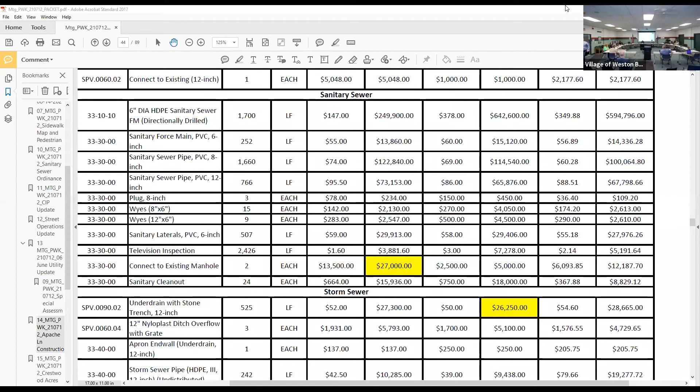Anytime we had a project like this, it did collapse. We had the same discussion. Business 51 did collapse. And it collapsed, what are you saying, collapsed or flexed? Collapse. If it is the sand, it will. If it's the clay, it might hold up. If it is the rock, it's going to hold up, is it the same?

But he can't bore it, unless you drill it, is the issue on this? Yeah, I mean, I guess, yeah, it is. Well, that's his problem. Yeah, I mean, that's his problem. You've got to get crossed, you've got to get crossed. But at least what I have seen in the past, we had this problem around this area.

Sure. Any other question? You have a question? No. Okay, I'll accept the motion to award the contract. Go bring the number up, please. I think it's 2,000,000... 45. Yes.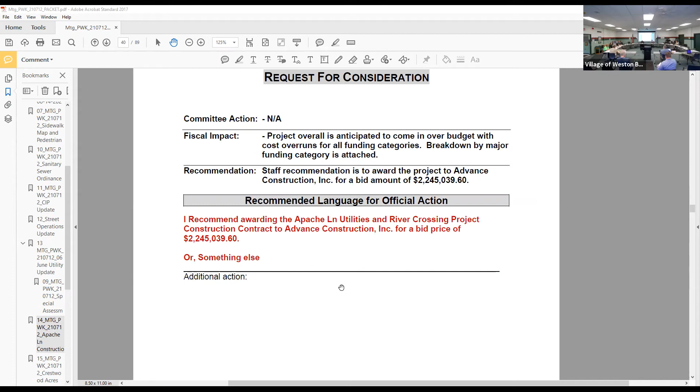You're not sure? Is there more question? We can talk about it. Oh, I had all these questions. I mean, I've read these things. I went over it and I decided to call Michael. I said, no, not to bother him. We'll talk about it at the meeting so everybody can see the point. And that was my biggest thing initially too.

Tanya Westfall with Clark Dietz called the owner of the company, called the other municipalities, and made sure that it was a legitimate firm with experience capable of successful projects, and everything came back yes. He said he reviewed a project in California for Michael because they did a boring, and it was a huge project and they were asking for extra money and weren't being paid, but they had all kinds of reasons to get paid extra. Which I had a problem with, but anyway. Sure.

And I guess, well, we have to award the contract if that's the number, right? That's the number, and they're going to provide us with the performance bond, payment bond, and the insurance. So I think, sure, okay, I'll make a motion, or I'll move that we recommend awarding the Apache Lane Utilities and River Crossing Project Construction Contract to Advance Construction Inc. for a bid price of $2,245,039.60.

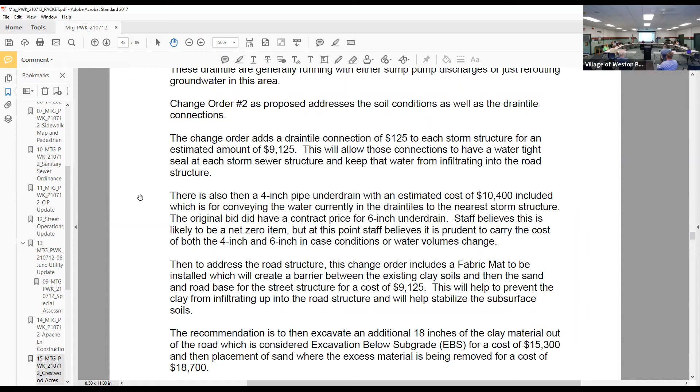The 4-inch under drain unit price, which is the same as the 6-inch that was in there. And then also the geotextile mat fabric, the extra excavation, and then the sand fill placement.

During the Rodney Street construction, there seemed to be quite a few springs and wet spots in the road. In other areas of the village we've used undercutting the subgrade extra, put in a sand lift and drain tile that dries out the sub base so you can build the road on top of it. Otherwise, the fear is this road would probably not dry out for quite some time and stay kind of a slippery mess.

Where are they connecting the drain tile? To the storm sewer.

What's the total? 59,573.

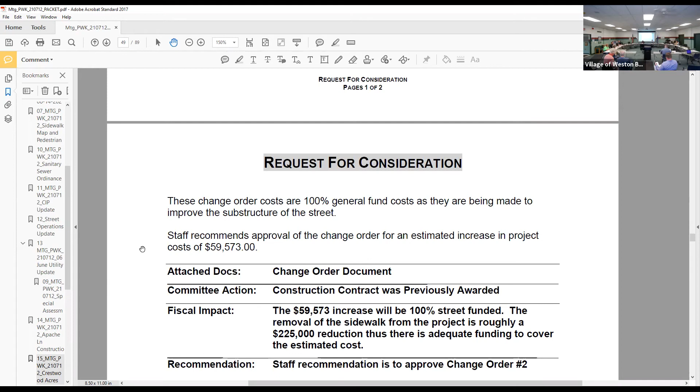Big number. Yeah, it's for all the different components, so the drain tile numbers are based on one for every property. We may not use one for every property, so we'd get credit if it's less.

It's just a unit price number, so we're approving the $125 per connection. If there's only 50 connections instead of 73, it's the lower number instead of the higher one. I guess it's probably not quite right, but...

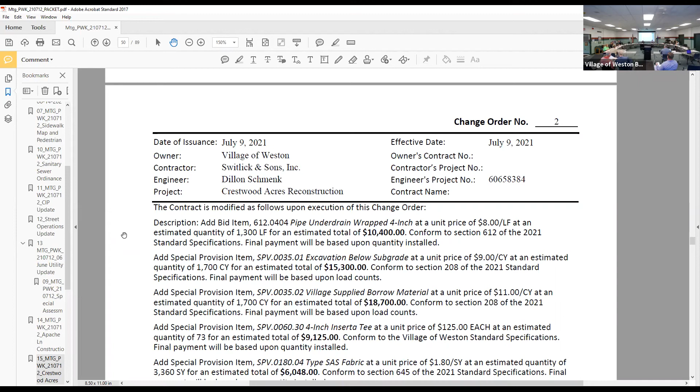Same thing with the extra excavation and the fabric, it's all based on the unit price costs. Okay.

Question? This is just planning commission.

I was gonna bring this up last time and didn't. If there's a change order the engineer forgot to put in part of a contract, I'm gonna make an assumption that if he had it, we have to pay for it. But we'd like to pay actual costs. Change orders always have 15, 20, 25% over in there. So we'd like to pay the cost.

Yeah, extra cost. The engineer can pay the extra cost because he caused that.

Just keep in mind, we asked Switlick for the breakdown of how they got $11 a yard for this. They said, well, the truck costs about $60 an hour, and you can put so many yards in the truck, and then we have to drive it 20 minutes to dump it and come back, so.

You can call wherever they're getting it and they give us a price. We're providing the sand as the village, so that's free. But when I look at these unit prices compared to Apache Lane, where we're also providing the base course material, the bid prices there were like $20 to $30 a cubic yard for the base. Here it's $11, so I think that's a pretty good number.

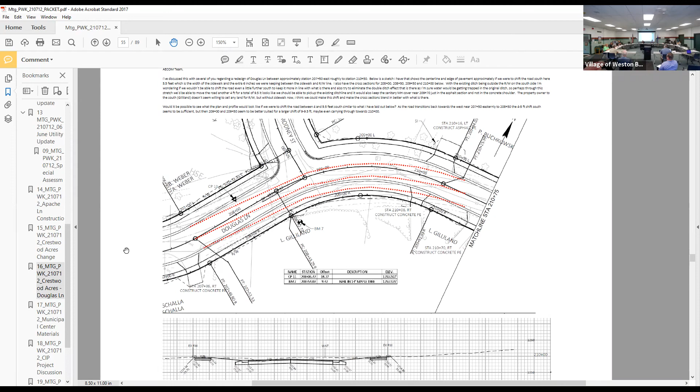Right, yep. So the roadway was designed centered in the right of way with the sidewalk on both sides. So now with the sidewalk being removed, we can look at realigning that road so it's closer to existing.

I guess the biggest reason for doing that is on the south side right now, this is the current ditch. If the road were to be put in centered, the ditch is over here, so that's almost 15 feet off of where the ditch is.

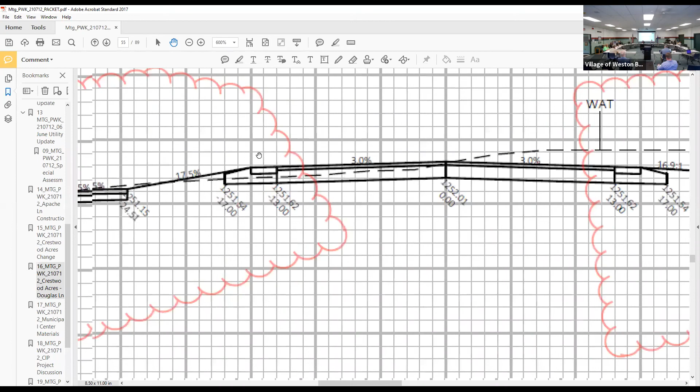And then on this one, I mentioned the potential use of curb and gutter. Water coming off the road on the north side, instead of being up here where we have a ditch, it's down here where it's kind of a straight shot down into those yards.

So the ask is to realign that road further, shift it further south so it more mimics closer to where it is existing versus trying to center it.

So if you put a curb and gutter, you put the storm in there also? Yeah, so there's storm sewer already. Right, you direct it down to Rodney Street and tie it into the storm sewer there. Correct.

And how much is the change order? 3,900 to update the plans and cross sections, that's for the electronic design.

What's the construction cost? I think it might even be less. Like I said, it's a unit price contract, so it should be less fill, should be less, maybe 220,000?

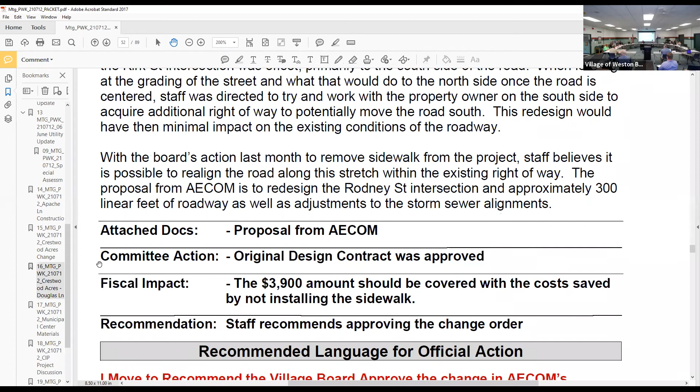How much was the sidewalk? Removing the sidewalk was, I think, 225,000. Yeah, I'm guessing there will be some cost savings because you're not building a road where there isn't currently a road, and you're building it more in line with where it currently is.

So it'll be less fill. So we're gonna get that change order after design is done. Yeah, and like I said, I don't know if there should necessarily be a construction change order, because the water, sewer, storm sewer lines are still staying where they are.

It's just, like we said, there'll be less cut of the road. You have to have a change order to take the sidewalk off the project. So we'll need that change order with the cost in there, then another change order for the redesign, for the road and your curb and gutter.

Yeah, I mean, we can lump that out. Well, in order to keep your booking correctly, yeah. That's what you gotta do. Yeah, at the end, we would have a correction change order at the end to remove the quantity of sidewalk.

I'm sure you've had many conversations with the residents that live near this intersection. Yeah, ever since this project started. Are they more in favor of this plan to keep it more where it is now? Yes.

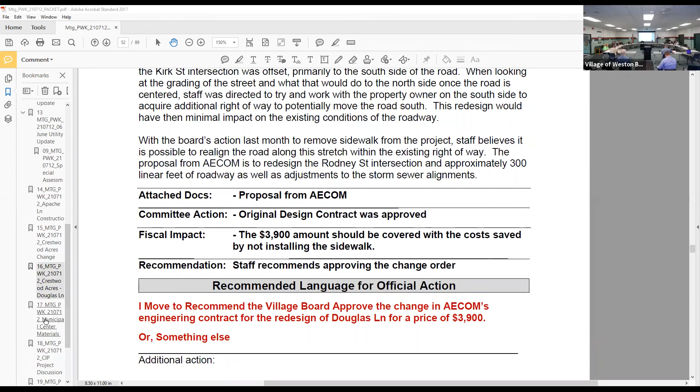Item 17, recommendation on approved material testing contract for municipal center.

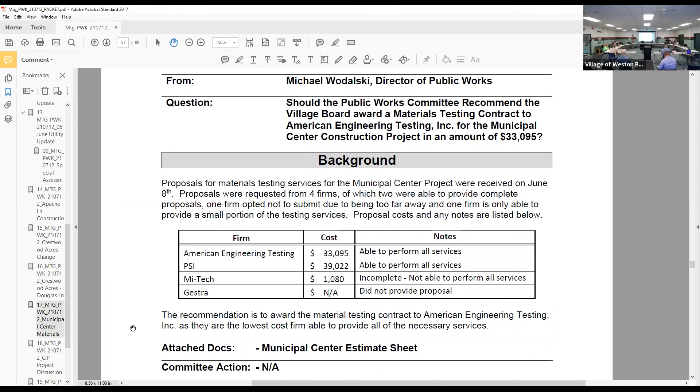Proposals were sent out to 4 firms that do this type of work. We received back 2 complete proposals. One firm said their office is too far away, so they weren't even going to provide one. Then we got one from Mi-Tech, but they were only able to do a very small portion of the necessary task, so that one was deemed incomplete.

So the recommendation is to go with American Engineering Testing for $33,095, since they are able to perform all the services requested.

So they're not gonna charge us for room and board and lunch? No. What about mileage? Nope, no mileage either. That was in the proposal since they're right there, about a mile away from us. Yes, I think that played into them being the low cost too.

Okay, what's your wishes? I'll make a motion to recommend the village board award the materials testing contract to American Engineering Testing for the municipal center construction project at $33,095.

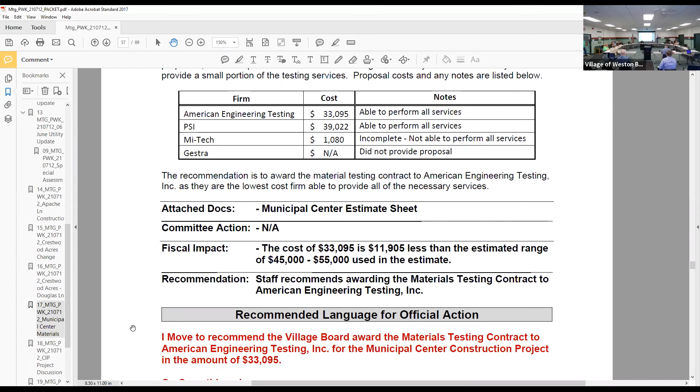I second. Discussion? All in favor signify by saying aye. Aye. Opposed? I have it, thank you.

Item 18, discussion on capital improvement plan, future project list.

What would you like to talk about? You like your list, the way you got them? Yeah, I guess so, I just laid it out. We're kind of 2 years into this plan that started in 2020. We've got several projects listed in 22, 23, and 24, and then some other projects that would fill in that year 25, 26 gap, so it's just curious if there's any other projects the committee had in mind or want to look at rearranging.

I do. Maybe take a look at it, bring it back to another meeting.

We can talk about it. The water plan - oh okay, so these are just street projects. Figured next meeting I'd touch on the utility projects, and probably fleet, and then by September we'd have the full picture. Figured it'd be easier to look at this, since you're gonna combine them eventually - it'll be utility, all combined into one project. Okay, we'll talk about it more next meeting.

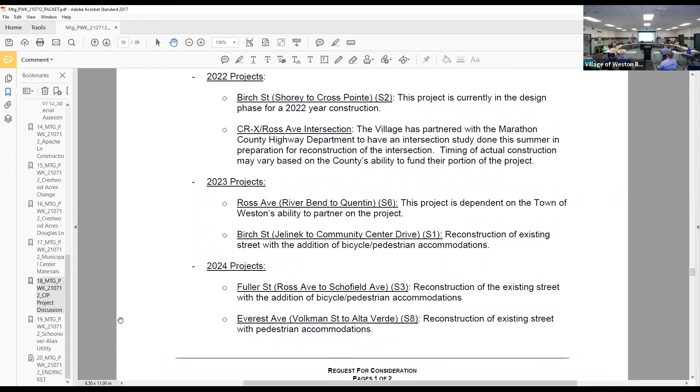Okay, what's that? Schoonover Road? Alan Lane Utility Extension Inquiry - we had a resident at the intersection of Schoonover and Ross Avenue contact us about the possibility of getting served with municipal water and sewer service, or primarily municipal water. They're having issues with their well. Before I told them yes or no, I figured I'd see what the committee's thoughts on potentially providing service to that property would be.

Option one would be a full utility extension, a water main looping project that would serve all of these properties - I believe it's about a little over a dozen, maybe 15, in between Sandy Lane and coming up Alan Lane here, which turns into Schoonover. So that'd be the big project.

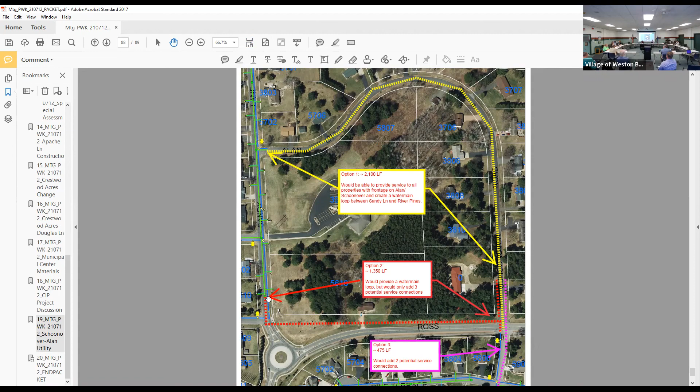There's also two smaller options: one of just connecting on Sandy Lane here, running water and sewer on the north side of Ross Avenue, bringing it up. Or the third option of just going straight to River Pines Court or River Pines Terrace - that's a lot more disruption in the pavement.

The other option is if we weren't requiring sewer and just allowed a water connection - just connecting here, the 475 feet would probably be the cheapest solution. But if we wanted to make water and sewer a package deal, we could look at putting estimates together or send out a survey to the rest of the neighborhood to see if anybody else is having issues with their systems.

There's a couple of issues. If we just give him the water, his sewer system's gonna fail sooner than later - because of the water pressure. He's getting at 60 or 90 PSI, and the existing water pressure is maybe 20-30 PSI. I'm not sure, but I see Mr. Donald doesn't agree with me. Well, by the time it goes to the sewer system, it's gonna be the same pressure, other than maybe they'll get a little more volume over time. That's it - that more volume he's getting, he's gonna fail his system sooner than later.